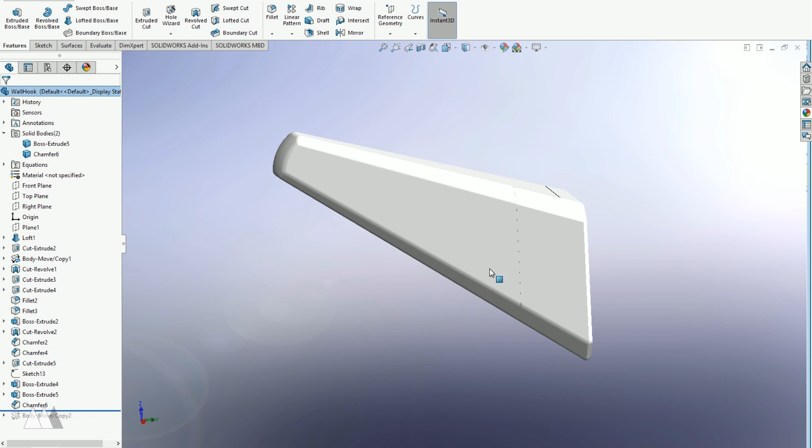So here is the final part in SolidWorks. So as you can see, it looks like one pretty much seamless part, and it's super simple. But there's a little bit going on here that you can't exactly see. So if I turn the lines on, it's actually 2 parts. And I did that so that I could hide the screw inside of the part and not have it visible, because I want this to look like it's basically just coming straight out of the wall.

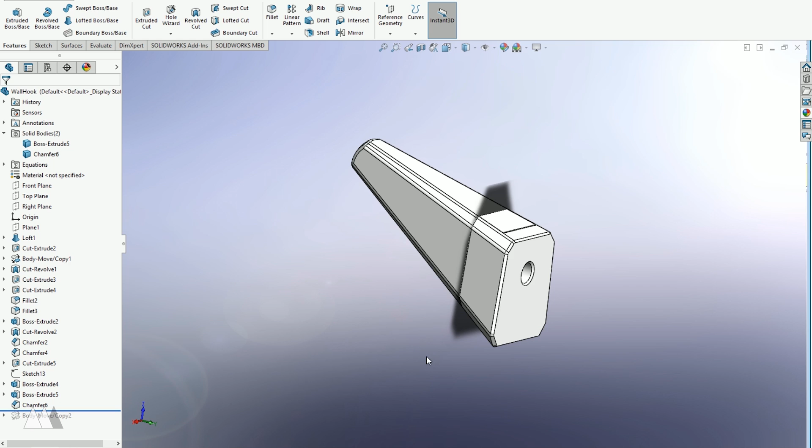So let's go back to the beginning, and I'll just quickly run through what I did to get to this point. So the first thing I did here is a loft, and basically that means I've created 2 sketches, this top and bottom surface, and then SolidWorks creates a solid shape by transitioning between one shape to the next. And that creates this shape that I wanted here.

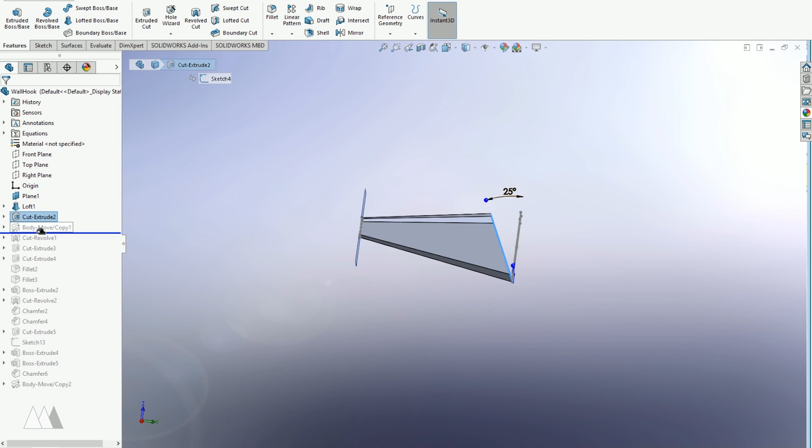The next thing I did was cut off this 25-degree section on the back of the part. And that creates that downward angle that makes this a hook. So when you put a strap on there, it'll slide towards the wall and stay there instead of sliding off the wall, which you obviously don't want. Next, I did a little cut revolve on the tip of this hook. So I wanted it to be a little rounded. It just looks friendlier and more finessed.

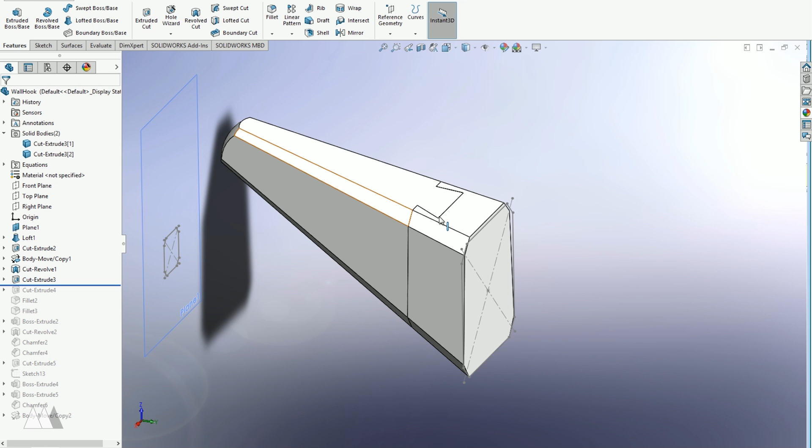Alright, so now that I have the general shape, I did this cut extrude from the top down, and I basically created this dovetail joint. And that's going to be my way of joining these 2 pieces together so that they stay together. Of course, the way it is right now, it would still be able to just slide all the way through, so I have to create some kind of a stopper on the bottom of my hook.

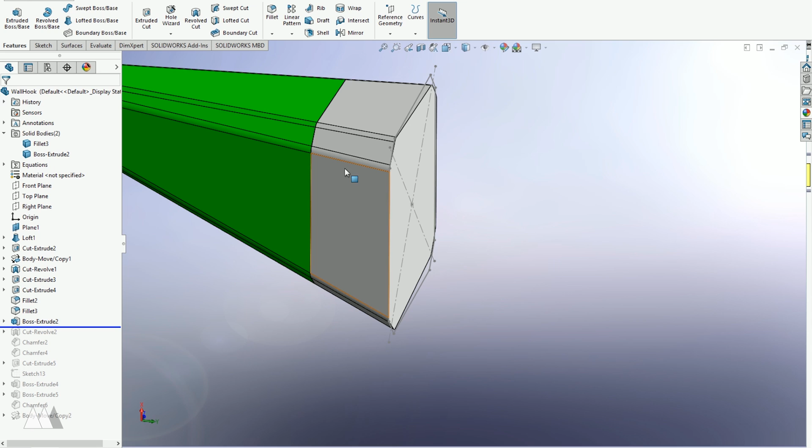So what I did was cut away a little bit of the dovetail on this longer part, and I'm going to change the color so you can distinguish the 2 sides. But yeah, so I cut that tab off, and then I filled it back in, but this time it's part of the smaller piece. So if I do a cross section, you can see there's this stopper here that keeps the hook from sliding all the way down.

Next, I did a revolve cut based on the dimensions of the wood screw that I'm using. So you can see I measured the diameter of the head, and I also measured the diameter of the threaded area to make sure that the screw would be able to go in there and be flush and nice. I added a few chamfers just so it prints cleaner.

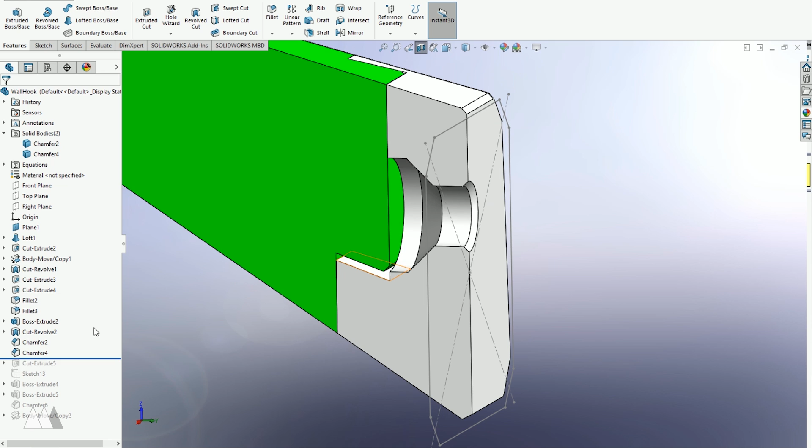And then also up here on the top, I didn't quite like how this rabbet joint looks because these angles don't really line up with the other angles on my part. So I decided to cut another chunk out of the top and then refill it with another tab that follows the lines of my model a little better. And that also acts as an additional stopper to make sure everything is held in place.

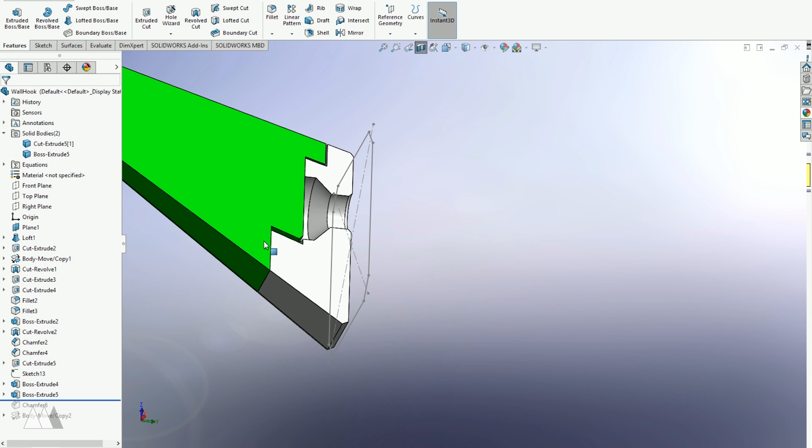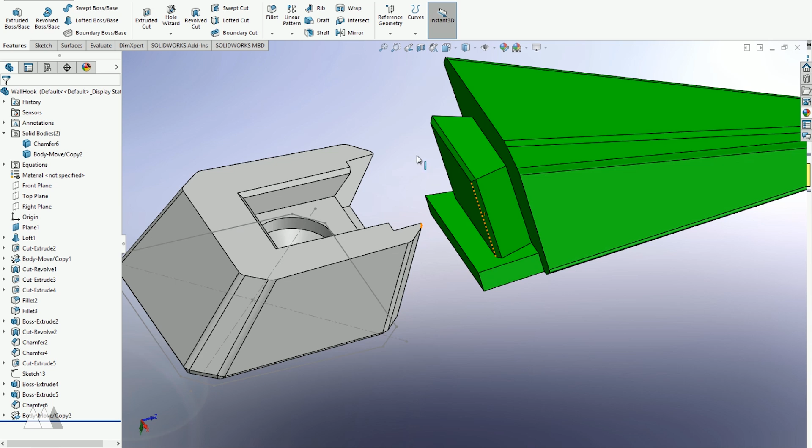So that's pretty much all there is to it. I just reoriented the parts that way they're both flat on the build plate, like this. And as you can see, I made this specifically so I could print it without any support material, which is always my goal. Now, in order to print this without support material, I actually have the 2 parts oriented differently. So you can see the dovetail here is going nearly vertical, and yet the dovetail on the base section is horizontal. And that affected the tolerances when I was designing this model.

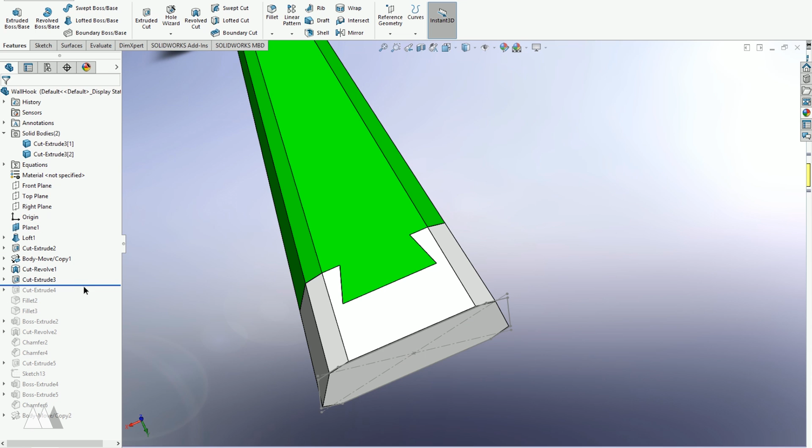So if we look back at that extruded cut that I used to create the dovetail joint, the width of that cut is only 0.01 millimeters. And normally I'll do something like 0.2 or 0.25 millimeters for a nice tight fit. But since we're printing in 2 different orientations, and because of the way my printer is calibrated, that didn't quite work, and I actually ended up having to make the tolerance a lot tighter. So my first attempt at this print actually came out a little too loose, and I had to adjust it until I was able to figure out that that little tiny 0.01 millimeter tolerance worked the best. So let's go ahead and look at how that printed out.

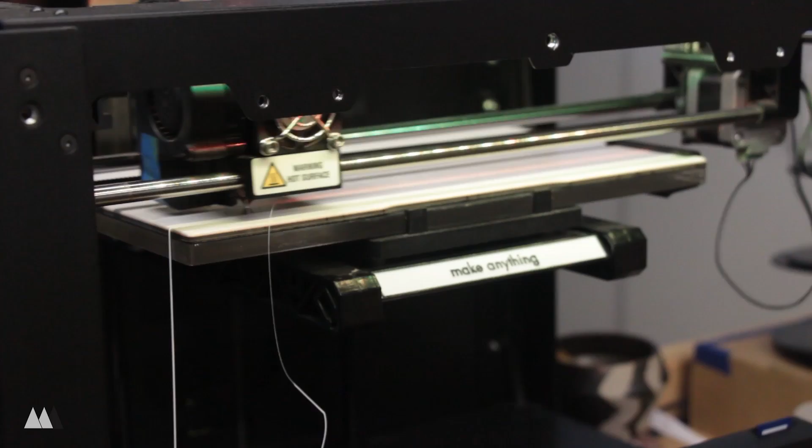If you look closely here, you'll notice that I'm printing the 2 parts with a different infill. So the part that's going to be screwed into the wall has about 80% infill because I don't want the screw to crack the PLA. But the other part of the hook is only printed at 15% infill because, well, PLA is pretty darn strong and that's all that I need to hold up my backpacks.

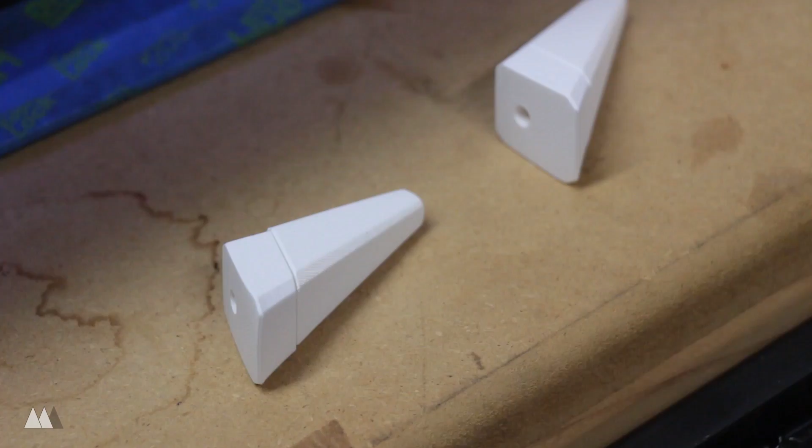So here's that iteration that finally worked, fitting together nice and neat. Compare that to my first attempt, and you'll see that was pretty loose, and that's when I had a 0.2mm tolerance. So depending on the orientation that you print your joints, the tolerance might change. The screw, however, did fit nice and perfectly on my first try, and it's always satisfying when a real part fits with a 3D printed part really nicely.

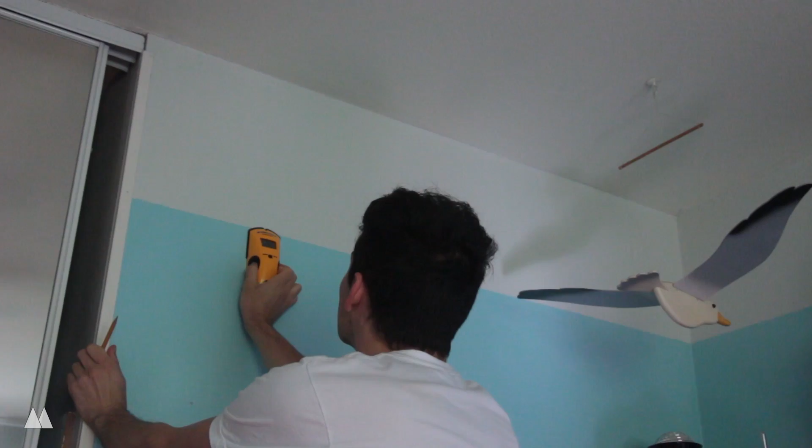Alright, so now that I've got my hooks, I just need to install them on my wall. So I'm going to use this stud finder to figure out exactly where the wooden supports behind the drywall are. And while you could just screw these into the wall wherever you like, using a stud finder and making sure that you're screwing into one of those 2x4s is going to give you a lot more strength and safety with your hooks. Next, I drilled a pilot hole, which will just help guide the wood screws straight into the wall.

And then I just screwed that base of the hook into the wall and made sure it was really tight and slipped on the end. As you can see, it works pretty well. So I added 2 more hooks, 16 inches apart, as the studs in a wall usually are, and that just happened to also be a great distance for these hooks to be separated, so that worked out well.

Well, check it out. What do you think? I think it's a nice clean solution. I've got a lot more space on my floor now, so I'm pretty excited and pretty happy with how that turned out, and it didn't take too long at all. I think the next step for this project would be to modify the hook so that it can hold my guitar against the wall. That'd be pretty cool, but that's for another episode.